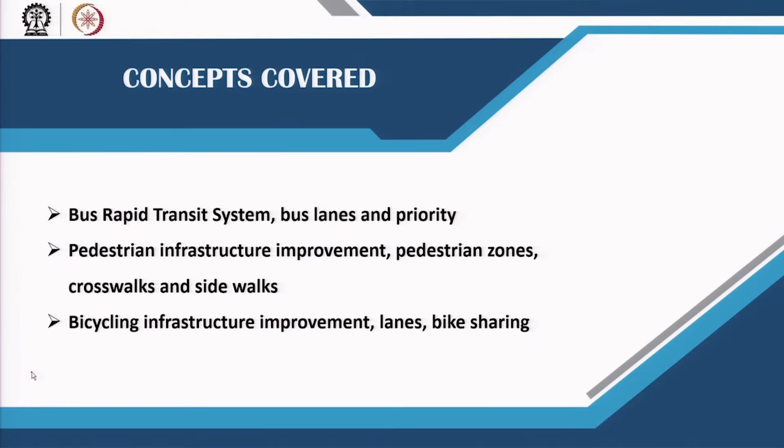Improving transit, right? We have already looked at how you can improve the quality of your public transportation system in your city, quality of service, and what measures that depends upon. What the pull TDM strategy looks at is how ridership changes when you make a certain improvement in your transit service. In other words, are people now going to use your public transit more compared to their personal private transit if you make certain improvements in your existing public transportation network?

And these improvements need not be capacity related improvements. They could be about how to improve the existing efficiency, how to increase the existing efficiency. In extreme cases, in worst cases, capacity improvement is also one of the tools of improving efficiency, but it has to be the last tool we resort to. We have to first exhaust all of the TDM mechanisms, or all the mechanisms by which we can improve the efficiency of the current system itself.

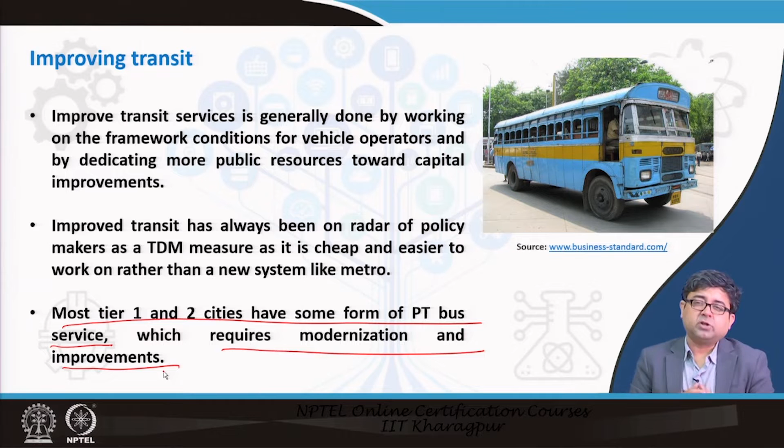That is how TDM pull measures are applied or implemented and then measured for how well they are working. It is not just good enough to have a skeleton public transportation system in your city and say, well, we do have a system, so we do not know why it is not working, why people are not using it, so on and so forth.

Many cities have multiple public transportation operators, such as different bus companies or different local governments. In a large metropolitan area, different agencies may run different bus services, and often these route networks and schedules are not well coordinated. We have already looked at these examples, and these are what they call low hanging fruits. If you address these without increasing capacity, without adding new buses or buying bigger ones, you can improve the efficiency of the system and attract more users.

You may have two different jurisdictions, from a municipal corporation area to a municipality area. In a large metropolitan area that may be the case, where you travel from the city core to the suburban area or vice versa. There may be two administrative jurisdictions, and if the bus operator in one jurisdiction is not in sync with the operator in the other, a person transferring at the boundary will face a problem.

If these transfers are not coordinated, if the schedules are not synced with each other, then nobody is going to use the public transportation system much. They will only use it rarely, maybe when their vehicle breaks down or is in the shop for some mechanical reason. So these are low hanging strategies - if you improve or work on them, your public transportation system can improve, and that can act as a pull measure.

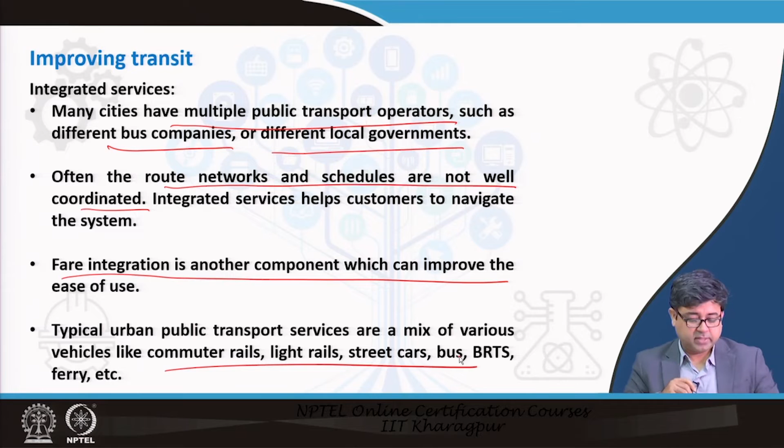So if you eliminate that and have fare integration between two or multiple modes across multiple jurisdictions, you improve efficiency and ridership is likely to increase. We have already touched upon the various modes you may have, so improving transit also means improving the type of transit.

Now we are talking about actual capacity improvements. When you shift or upgrade from regular city bus transport to a BRTS, or bus rapid transit system, you are not only improving the functionalities of the system but also creating additional capacity. This increase in capacity is better for urban transport sustainability compared to a pure increase in capacity through widening a road. So what has been seen is that when urban transport officials do want to widen a road, if that extra capacity is used for any public transportation mode, then that kind of widening or increase in supply is welcome.

It acts as a pull measure - not as a deterrent to sustainability, but as an attractive force towards sustainability. So this kind of improvement from a skeleton bus network or an existing bus network that runs on a mixed right of way, to creating a bus rapid transit system that has its own right of way, increases the attractiveness of bus rapid transit or public transportation, and people get attracted to it.

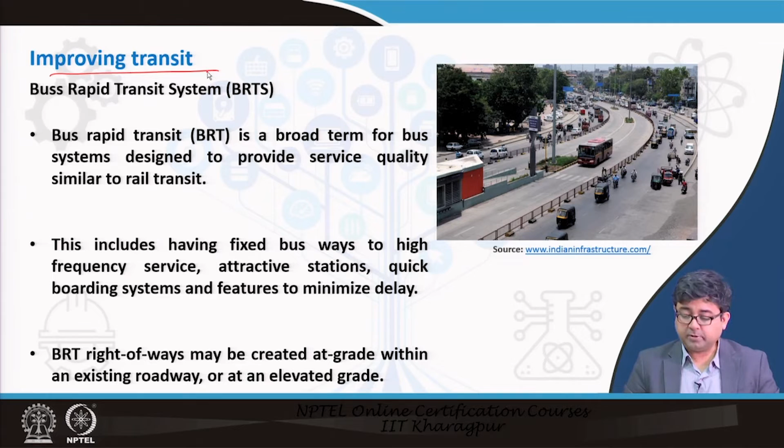You could also have dedicated bus lanes. Sometimes you would not have a full-fledged BRTS system, but at certain central business district areas, the regular city bus transport system would also be given dedicated bus lanes. This may be very close to a depot, or near the terminal stop at the CBD. Wherever congestion is high in the CBD, they would try to carve out a lane only for the buses, so that buses can enter and exit the CBD very quickly. These are also certain means of reducing travel time on the bus system. If you reduce travel time on the public transportation system, people are attracted to it.

So wherever a comprehensive BRTS system is not possible, simple bus lanes can act as a feasible solution - these are not comprehensive BRTS. A BRTS has dedicated right of way throughout the network, whereas bus lanes may be provided only at certain areas in the city, for example the central business district and so on.

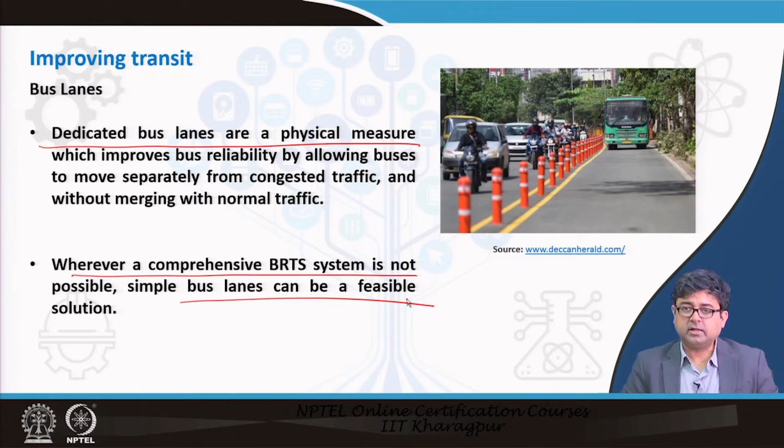So it acts in two different ways. First, when the detector detects that the bus has arrived at the junction when the signal is red, it will turn the signal green first for the bus, and then turn the signal green for the other traffic. That means there are two different green signals, one for the bus and one for general traffic - similar to how you would see two different greens for pedestrian crossings at some intersections, where the green walk signal has different timing than the green for regular traffic. Similarly, that could be for the bus.

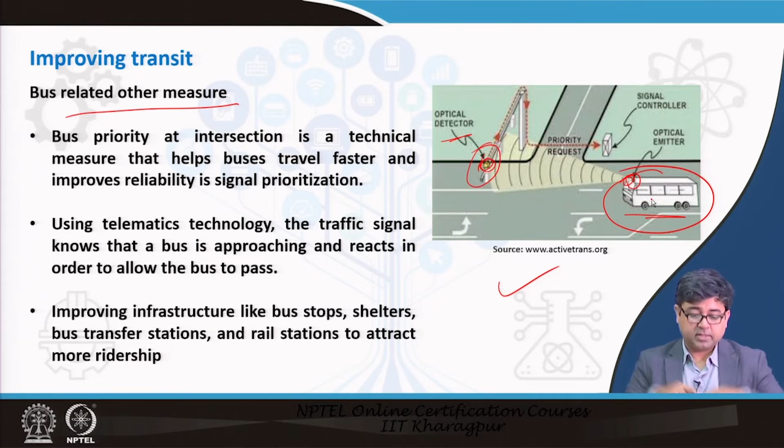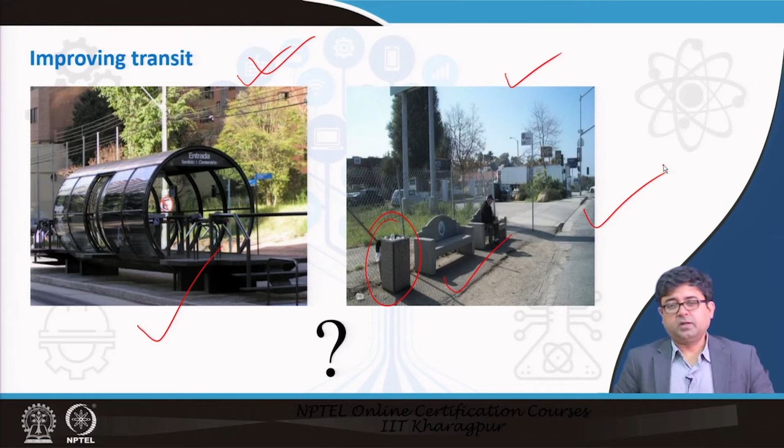Similarly, when we talk about pedestrian infrastructure, what are the different design elements that would attract people to walk? You already understand that people don't walk for longer distances. People of a certain age would not walk a longer distance because of physical inability or other reasons. So the most choice users who would want to walk are somewhere between a certain age group, and you have to make them walk as much as possible during an urban trip, or during multiple urban trips that are relatively shorter in distance.

You would notice that in many of our cities, trips are usually not very long because our cities are pretty dense, pretty compact, at least the city cores are, so land uses are very close to each other. All this makes walking very possible, but if you do not have proper infrastructure in place, even these short trips, which should be ideal for walking, get replaced by trips on motorized two-wheelers or even motorized three-wheelers, which is really not the sustainable way of moving forward.

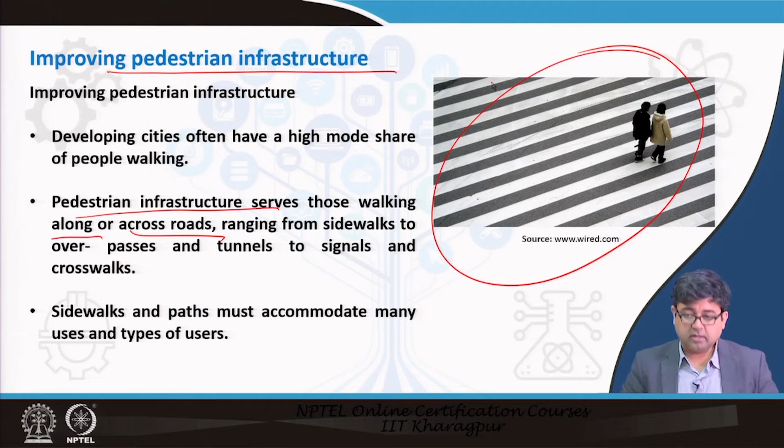Similarly, we have told you what are the different factors that are involved in improving the pedestrian level of service, and by improving the pedestrian level of service, what you are actually doing is making the walker or the pedestrian more comfortable during their walk or during their journey, and this attracts people to carry out their journey by walk. So, some of the measures include having good seating infrastructure, for example, along the footpaths.

Definitely not having littered sidewalks, for example, right. Sidewalks that are present are sometimes littered with various things because there are no proper garbage cans at proper locations, right. So, you have to now pay attention to the entire right of way, for example. That is the meaning of a pull measure.

You cannot just pay attention to the pavement section of the right of way and work on that pavement section, but if the right of way includes two sidewalks on both sides of the road, you have to pay attention to the sidewalks as well, because it is no good only providing a sidewalk which is 1 meter wide and providing a tick in any of the reviews saying that yes, we have provided a sidewalk

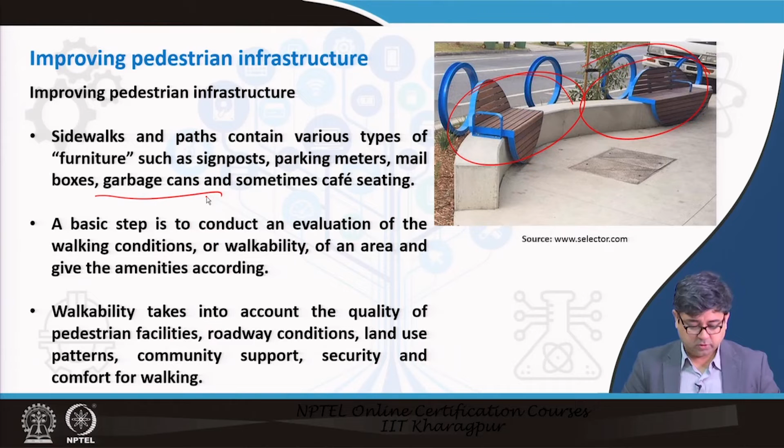and we are happy, but a 1 meter sidewalk may be equivalent to no sidewalk at all, because that does not provide a level of service that pedestrians need, and hence nobody would walk on it, and then you are left with unsustainable modes on the road, right. So, all of these points essentially demonstrate the same feature.

Again, you would see various infrastructure along the sidewalks that attract people to walk. You would even see along certain neighborhoods or along certain central business districts measures to calm the traffic down, right. Traffic calming, we learnt about in a couple of lectures before. What they would do is they would narrow the streets for motorized vehicles, or they would have a different texture of pavement that would disallow vehicles to go very fast.

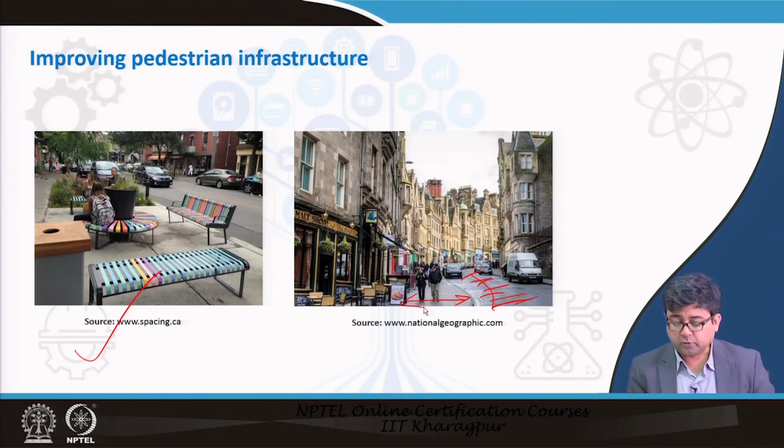So, these are different techniques, and then they would actually widen the sidewalk. These techniques make walking more attractive in these areas, and hence people who would have previously taken their two-wheeler or four-wheeler to come to this restaurant, for example, would now actually want to walk from their home, because they have good sidewalks or good footpaths, and vehicular speed has calmed down. So these all are actually pull measures that can help improve pedestrian transportation.

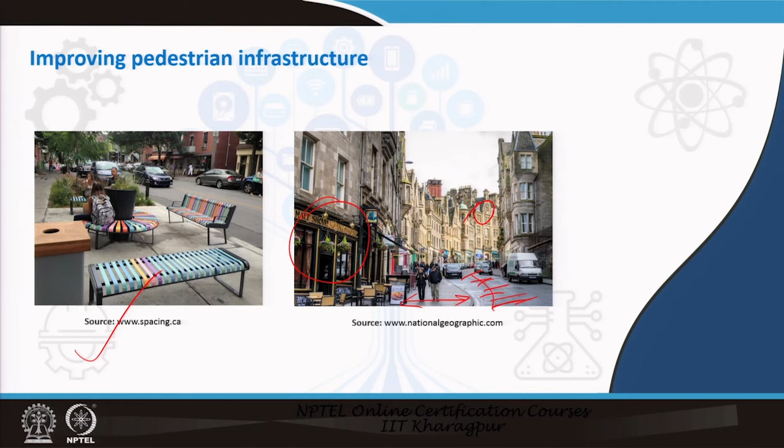Of course, crosswalks, you all know about crosswalks. They are very essential, especially because during your pedestrian journey between your origin and destination, you are bound to at least encounter one intersection, if not multiple, right. So at this intersection, you are actually now going to interact with motorized vehicles. But if you do not have such designated crosswalks, then you often undertake what is called jaywalking,

and that reduces safety. And if you feel unsafe while walking, you would not undertake that trip as a pedestrian, and you would maybe shift to a different mode. So we don't want that to happen. That is why we would provide good crossing facilities.

Again, you are aware that if the width of the road that you are crossing is too large, it's a divided urban arterial, then it is best to provide what is called an island in between, or on the median, so that the pedestrians who are crossing can wait on this island and make a second crossing. So you can cross the entire width of the road in two phases. This is the first phase, wait here, and then this is the second phase, based on how the traffic signal is designed at that intersection, right.

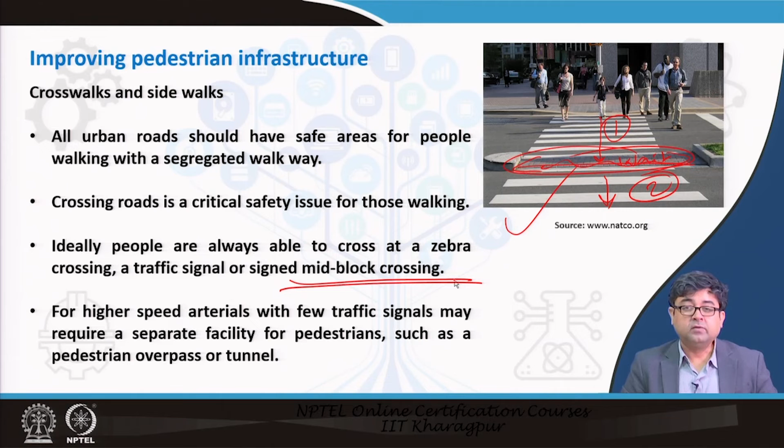Again, just like I showed you the picture for the transit stop, if I show you these two pictures and ask you which type of crosswalk would attract more people to walk, you should be able to say that this is the crosswalk which has a median refuge island. These crosswalks are nicely painted, and the ramps from the crosswalks are also provided, so that people with disabilities can actually use this crosswalk and get on the sidewalk safely.

So this type of crosswalk would attract more pedestrians, whereas this is a crosswalk which almost leads to nowhere, and the sidewalk is very high on the other side, and somebody using this crosswalk has to now jump up to access the sidewalk, or if anybody has to come from here, he or she has to jump down. So this kind of crosswalk does not make the trip very attractive, and should not be provided. Anyhow, these are a safety issue anyways.

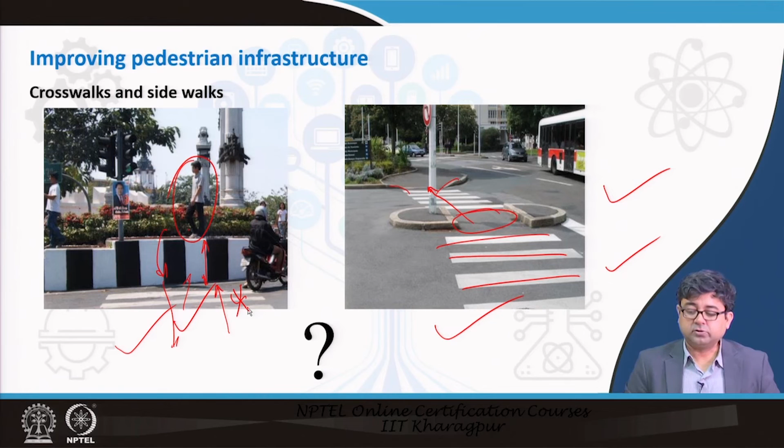So this is the type of crosswalk that would make your pedestrian trip more comfortable, and more people would be attracted to such a trip. So again, look at all of these in the context of being pull measures that you can provide for your pedestrian transport.

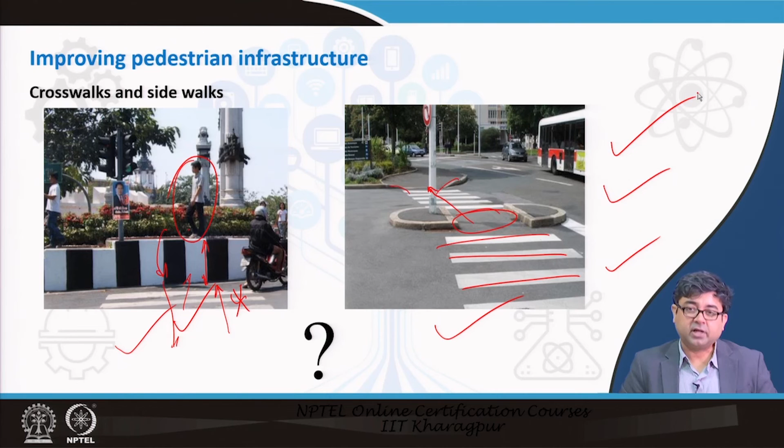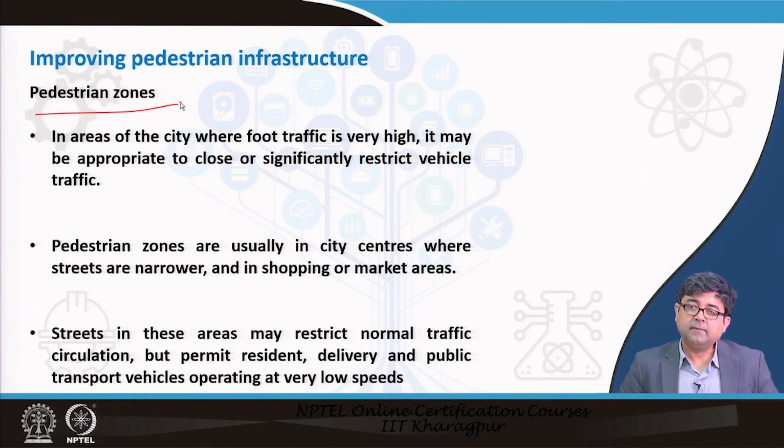Similarly, we talked in earlier classes, when we were looking at pedestrian transport in depth, about pedestrian zones. Several CBDs can be converted into pedestrian zones during certain hours of the day or certain days of the week. That makes pedestrian activity prioritized, and people would be more and more encouraged to use such zones, right.

These are three different pictures from three different cities. You would see an area at the intersection prior to some pedestrian improvements, and this is post the pedestrian improvements, where the median could be utilized for an open air cafe, for example, and make it more pedestrian friendly, whereas this was being used as an informal parking lot, which was not very pedestrian friendly.

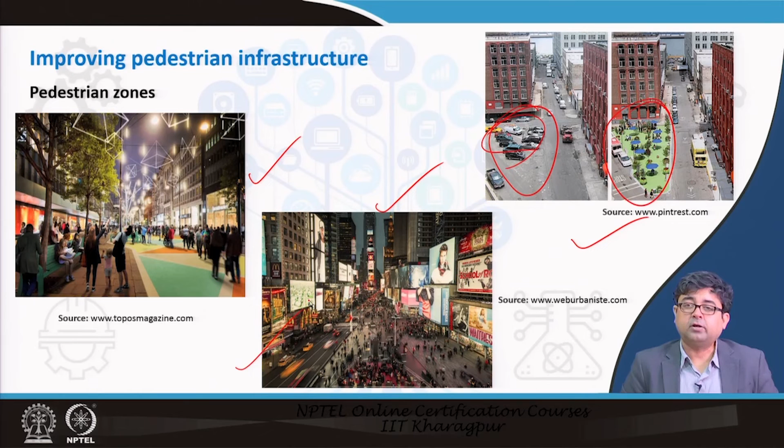This is of course Times Square, which has experimented with having reduced lanes for motorized vehicles and more area for pedestrians now, for example.

Finally, looking at bicycle infrastructure, many of the cities in India have a lot of bicyclists, but have allowed these bicyclists to use the roadway and mingle with motorized traffic during their journey, which is sometimes okay, beneficial when the speeds of the motorized vehicles are low, but when the speeds get higher, some safety issues creep up and make the bicycle journey not so comfortable, and hence people stop using bicycle modes.

The other issue with bicycles is that there is a stigma against it, saying that it's a mode not for the rich and the happening people. It's a mode for more economically weaker sections. However, that has changed over the last 2 decades, especially after the turn of the millennium, where now more and more people do want to bicycle longer distances even, and these are choice bicyclists, right. People who have the choice of using their motorized vehicles are now actually choosing the bicycle for certain types of trips.

Of course, for certain types of trips, maybe it's a weekend trip to the grocery store, maybe it's a weekday trip once a week to your office, or once a week to your college. Well, college most certainly should be 5 or 6 days a week, but there are different types of dedicated bicycle facilities that can also be provided, not just facilities that are common along with the motorized vehicles, but dedicated facilities.

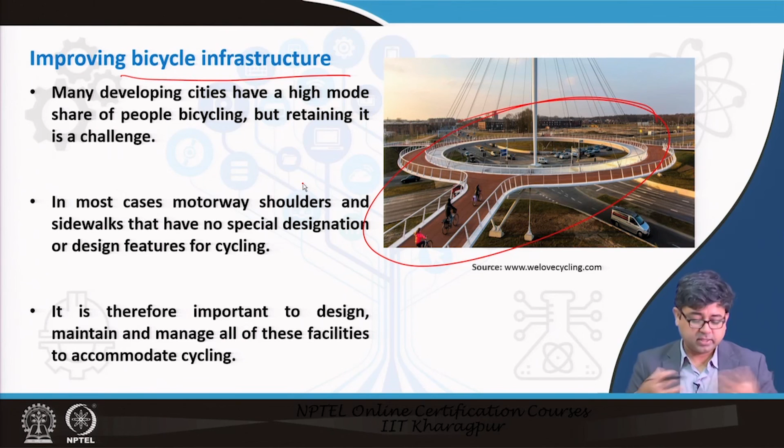So, the answer there would be that would be the last measure that you do, but again, like I said, for pedestrian and public transportation, you can resort to this last measure of increasing the capacity, as long as that is being used for some type of a sustainable mode, right. As long as the widening is not for motorized traffic, it is for a sustainable mode of transport, such as bicycle, pedestrian and public transport, it is still justified. However, that should be the last resort that you adopt.

Of course, bicycle lanes are getting more and more popular now. In India, some of the smart cities are getting these lanes. However, how to operate them is a challenge yet. How do you stop motorized two-wheelers, for example, scooters and bikes, from using these lanes? How do you disallow them, or how do you maybe fine them? All that fine tuning has not yet happened.

Bicycle lanes also need a good network; they should not be isolated in certain parts of the cities. That does not again encourage the choice bicyclists to use bicycles more for their daily trips. So, a network has to be developed, and sufficient provisions have to be made at the intersections again for these bicyclists, so that they can be separated from other traffic and cross the intersection in a safe manner.

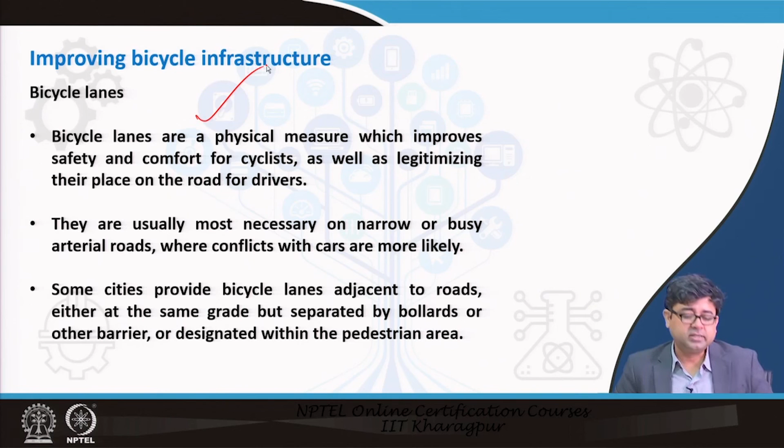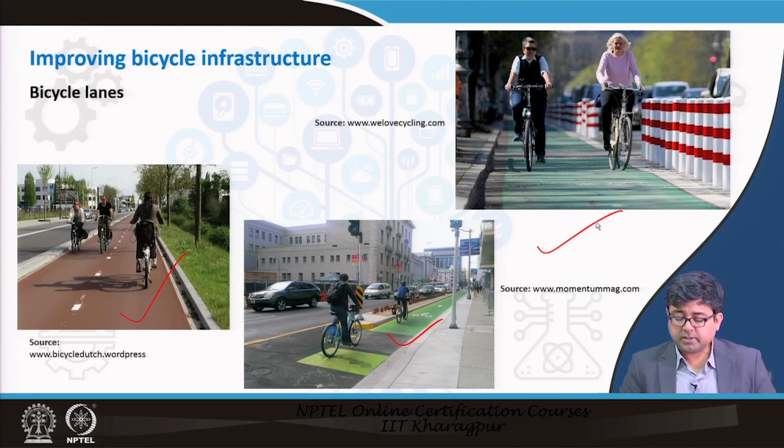So, many operational issues are still there, but at least at a planning level, at a thought level, these bicycle lanes are being developed. So, you would see such lanes coming up even in some of the Indian cities. Of course, these are pictures from abroad, from cities mostly in Europe.

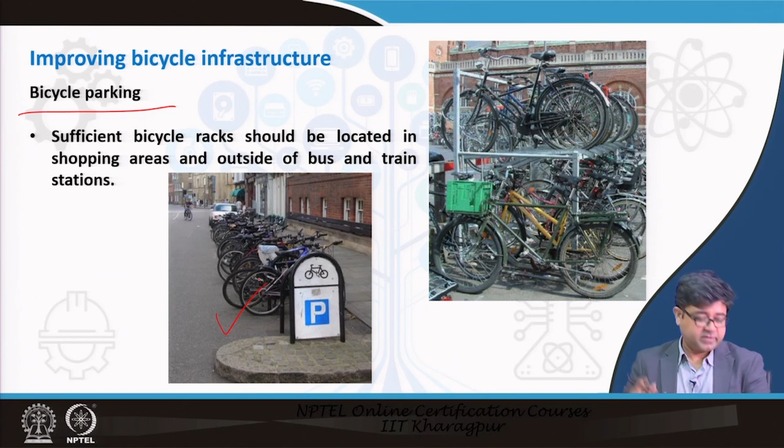Bicycle parking is one of the pull measures that is becoming more and more important. Although you provide these bicycle lanes, at the end of the day, if you don't have a safe parking facility, then people would not use bicycles to access the destination. So, safe and dedicated bicycle parking is being provided, right. It is not just tie your bicycle to an electric pole and leave it there and go. A safe, dedicated facility would encourage people to use more bicycles.

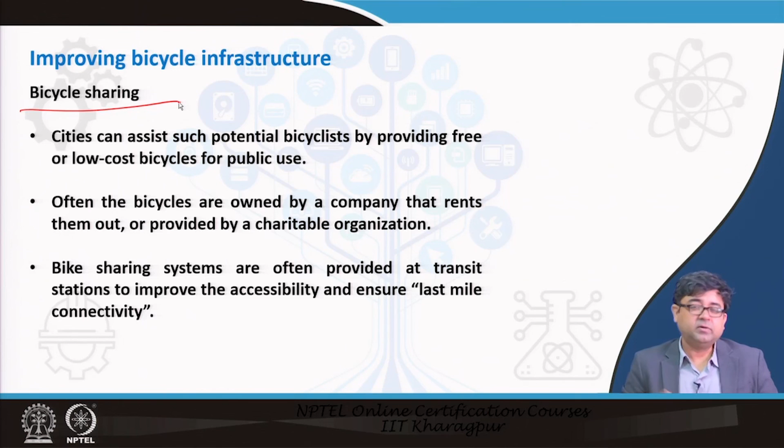Bicycle sharing is becoming popular. Many of the metro stations in India also have public bicycle sharing systems that enable people to access the metro stations using bicycle, paying a minimal fee for these shared cycles. You would see such systems in many cities in India as well and abroad. So, those are three different pull measures for three different modes that we have looked at.

But you should have gotten an idea now what type of strategies you can adopt, which are very easy to implement, right. Most of them are not high capital cost strategies. This will help in attracting the choice users to the sustainable modes of transport, and help in improving the sustainability of your overall public transportation network in your city.

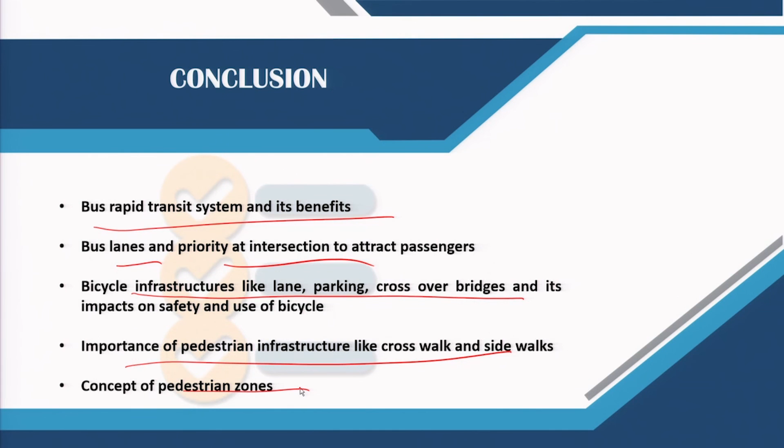So, just in conclusion, what we looked at in this session are the bus rapid transit improvements and benefits that would attract the choice users, how bus lanes and priority at signalized intersections would attract the users. We looked at different elements of bicycle infrastructure in the city that would make it more attractive for certain types of trips at certain types of destinations, and also looked at pedestrian infrastructure and concepts of pedestrian zones that make walking a more comfortable means of travel.